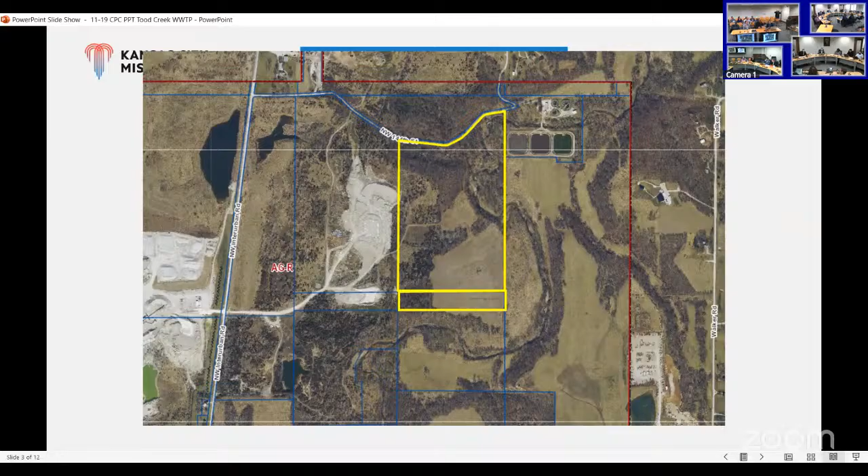The site is located in the very northernmost portion of the city, east of 169 Highway. Here's the site outlined in yellow. It is currently 2 parcels that will be combined, and you can see there is an existing access road off-site of the property that will be used to access this site, which you'll see in the site plan.

This is an AG-R agricultural residential district, which requires a development plan for utilities and services, which is the use for the wastewater treatment plant. Here we have the site plan, which is a combination of proposed buildings that will be constructed right away, and then also some future expansions. The total building area will be about 71,000 square feet.

There'll be a handful of basins, which you can see in the center of the site here, and then also a variety of administrative and operational buildings. The site will be accessed from the west on Interurban Road due to topographical constraints and sensitive environmental areas that restrict access from the north off of 144th Street.

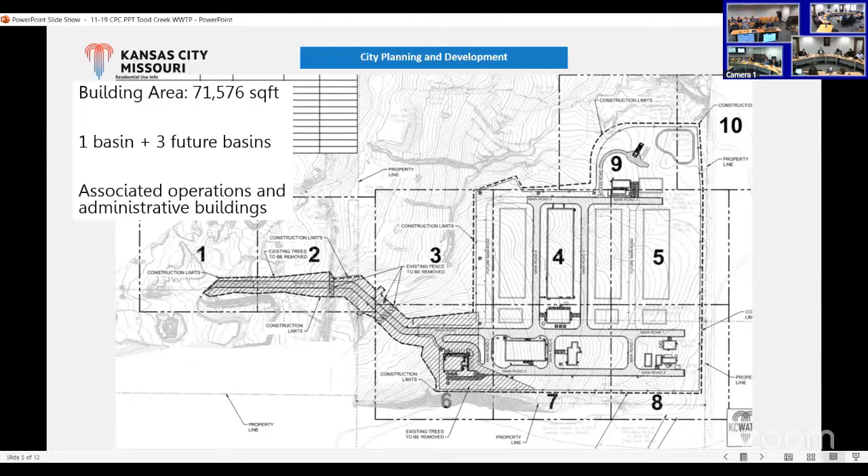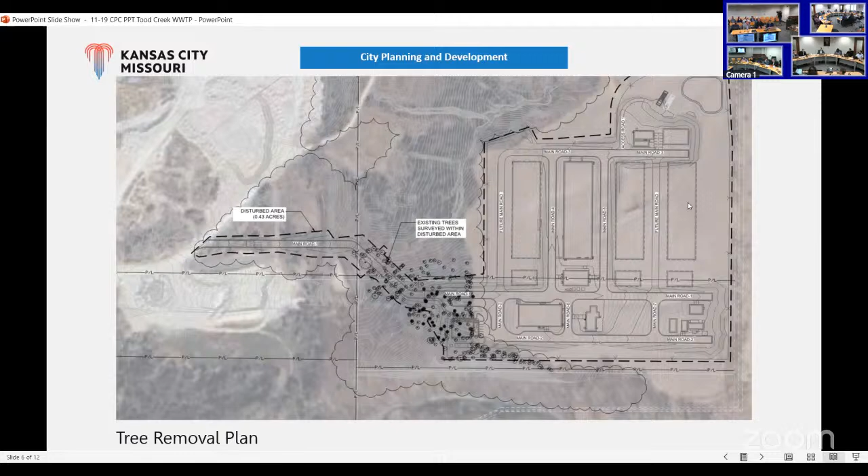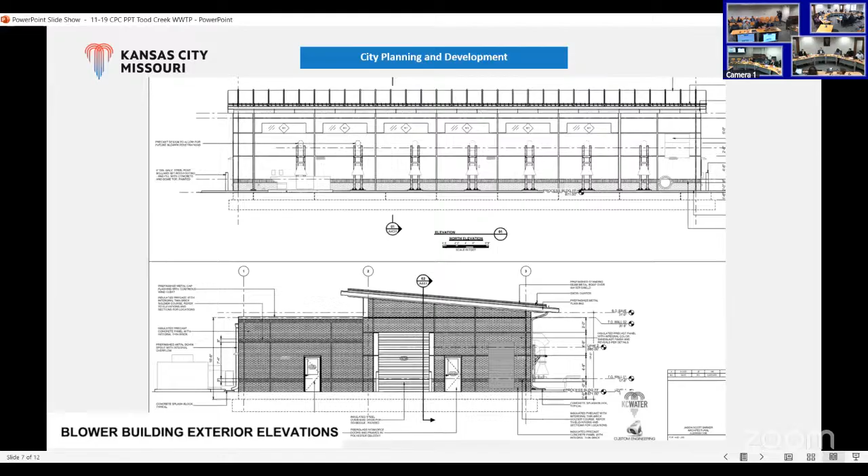There was a tree removal plan submitted with this proposal. As you can see, most of the development will take place in the area that does not contain mature riparian vegetation. I have some elevations of the buildings. Really, none of this will be visible from public right-of-way. It's very tucked back off of the road and will be set back off the interior property lines. These are just a variety of the admin buildings and other operational buildings.

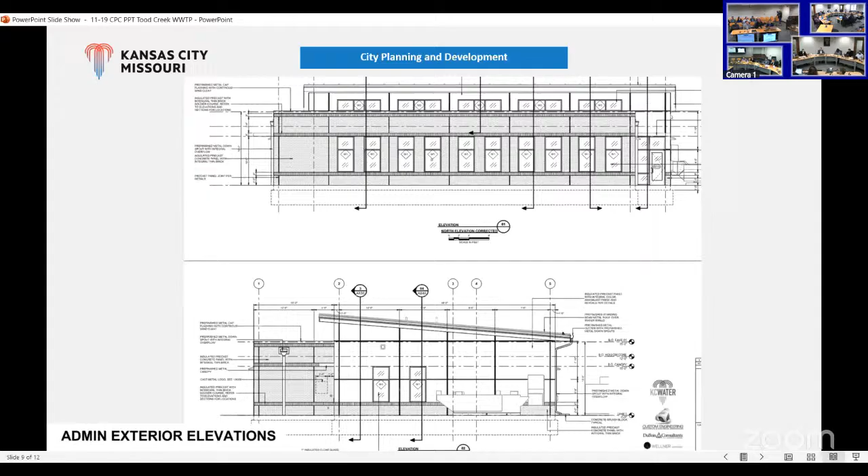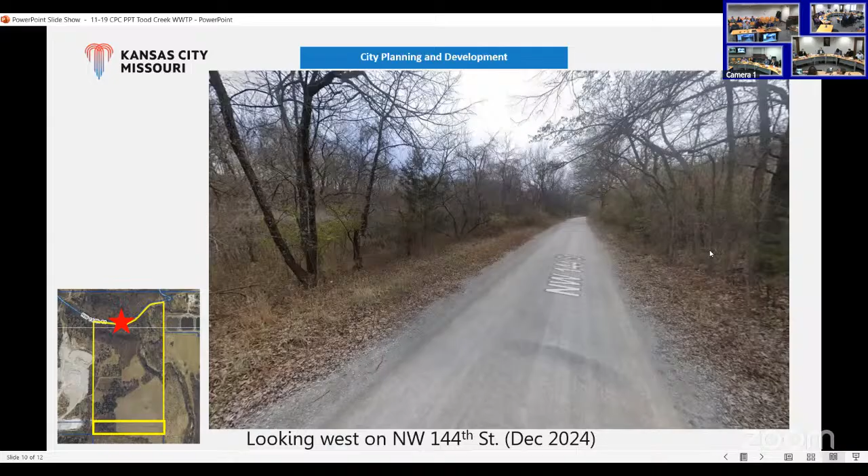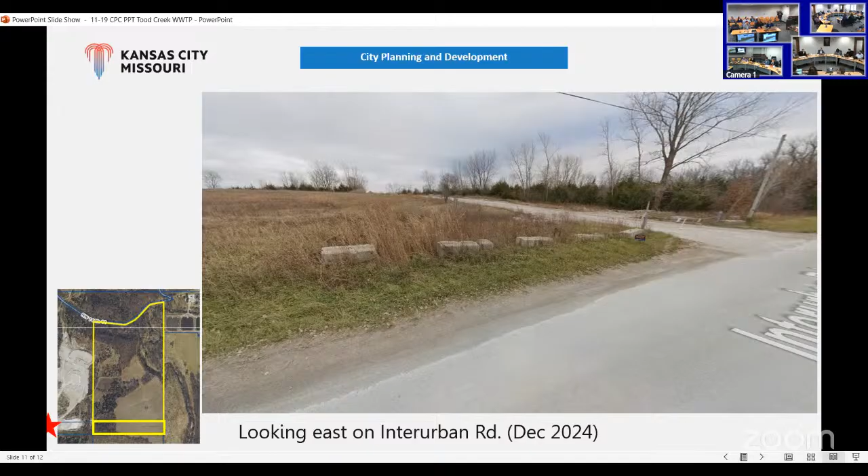Here are some street views of the site. This is the north side of the site. Again, nothing really will be visible from 144th Street. This is looking off of Interurban Road, where the access will be, and there will be cross-access easement agreements with Hunt Midwest, who owns the property that will be traversed to access this site. With that, staff is recommending approval with conditions of the development plan, and I can take any questions.

Thanks. Any questions for staff? If there are none, we will welcome the applicant. Welcome. Sorry, it's the first time doing this. I'm not really sure what to expect. Give me a presentation. Just introduce myself. Introduce yourself and anything you'd like to add.

Sean Cross, Senior Project Manager, Water Services. I'd just like to add that we're reaching capacity at our existing treatment plant up there in the Northland, and the condition of the existing plant is very poor. So that's the reason we're trying to move forward with this, and also to help support growth in the Northland.

Yeah, helpful for me. Can you give us an overview of this project and where it's located, how similar this is to the existing plant, et cetera? Yeah, absolutely. So the existing plant was built in the 1960s and then upgraded again in the 1990s. Back in 2020, we started a facility plan to review the condition, the growth in the area, and what we wanted to do with this existing facility. What we ended up finding out was in 2017, FEMA revised their base flood elevation by like 6 feet, which puts the existing plant mostly underwater.

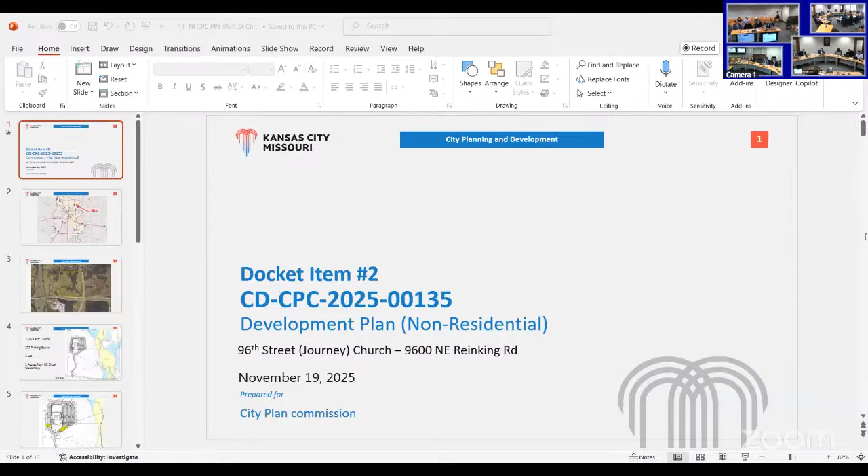Good morning. Morning. Are those for us? Of course they are. Are you going to replace those trees? Of course.

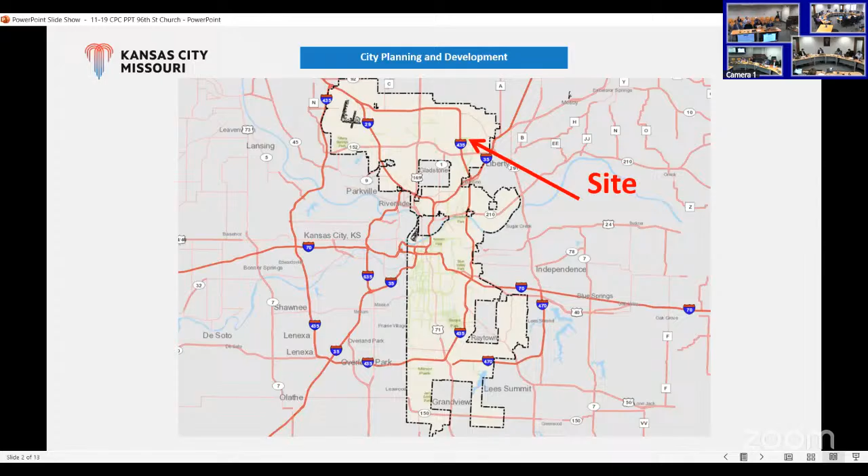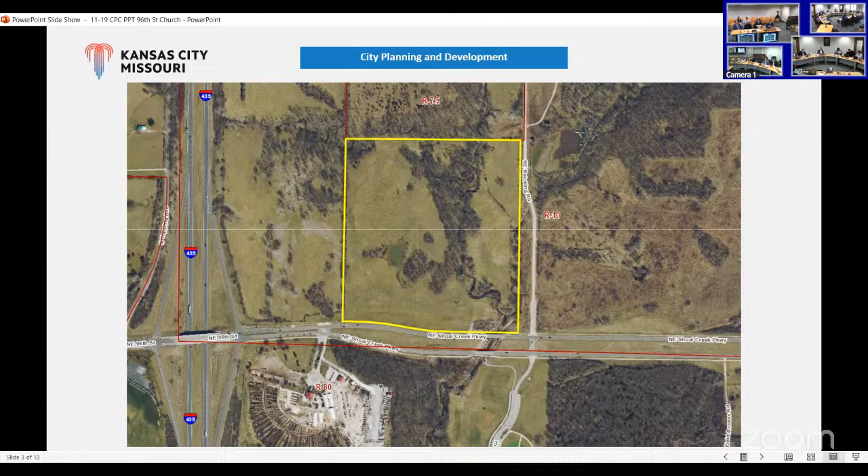As stated, we have docket item number 2 for a development plan for the 96th Street or Journey Church at 9600 Northeast Reinking Road. The site is generally located in the northeastern portion of the city, west of Liberty. Here's the subject site highlighted in yellow at the corner of Shoal Creek Parkway and Reinking Road. I'll note that this site is zoned R10.

That is why you have a development plan in front of you - religious assembly uses require a special use permit in R districts, however the applicant chose to file a development plan in place of that special use permit. The site plan before you proposes just under 23,000 square foot church with 222 parking spaces, all on the existing lot, with one proposed access from Shoal Creek Parkway to the south, staying out of all the stream buffer area to the east, adjacent to Reinking Road.

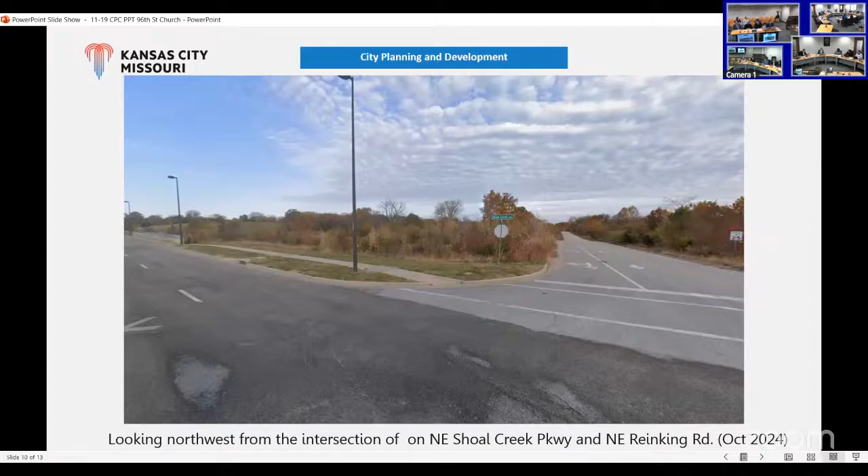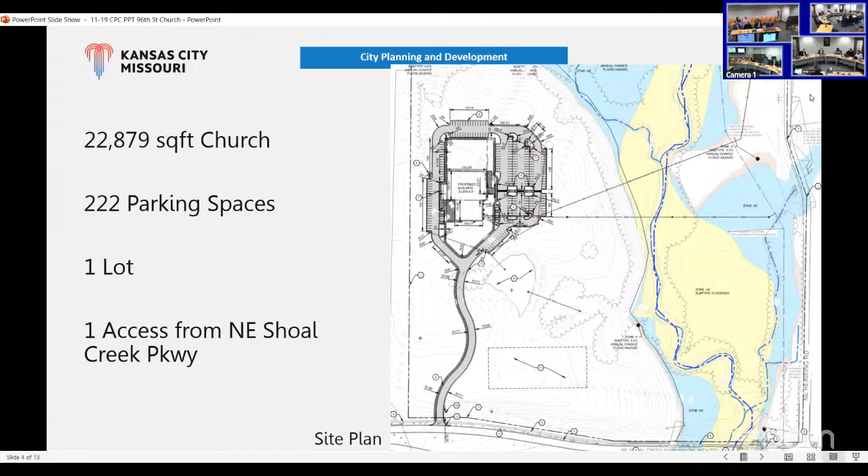Correction number 5 is from Water Services to extend the water main along the property frontage. Just jumping back to the site plan really quickly, the water main is north of this site in Reinking Road, and so the applicant is proposing to extend the water main to the northeast corner of the site and then carry it across to serve the building. I can let the Water Services staff speak more in detail about the requirement, but I believe they are asking for the applicant to extend the water main the entire frontage of the site.

So those are some of the outstanding corrections. There is a condition in the report that says all these corrections must be resolved prior to any ordinance request. With that, staff is recommending approval subject to all the conditions, and the condition that the plan be revised prior to going to City Council. And I can take any questions.

Thank you. To be clear, on plan corrections 1 and 3, are you saying those have been resolved in a different way and can be removed? They have not been resolved yet, but I spoke to the engineer on the plan, and he seemed clear on how he was going to revise the plan. So those will be submitted and then re-reviewed by staff before the ordinance is prepared.

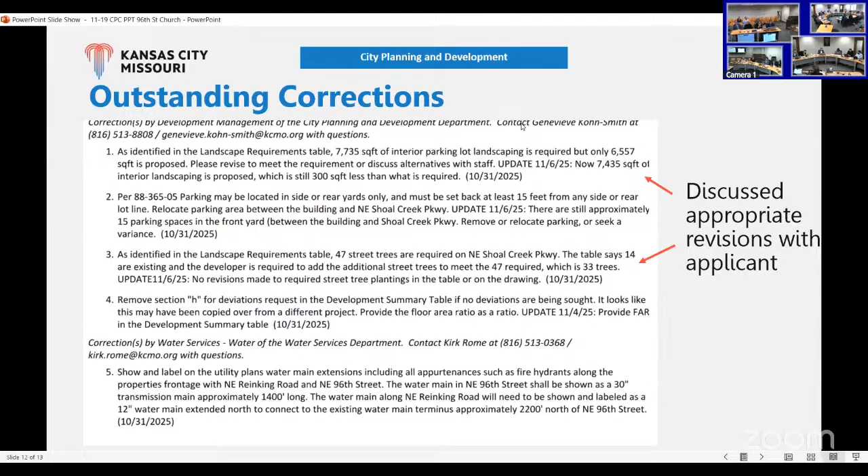Got it. All right, any questions for city staff? Genevieve, can you repeat for me again the portion of the parking that you said needed to be changed? You said something about 15 spaces in front?

Yes, so the use standards for public and civic uses state that all parking must be in the side or rear of the building. And these spaces that I've highlighted are, it's a little bit confusing because the building is facing east, but the front property line is generally considered the shortest street abutting property line. In this case, that would be Shoal Creek Parkway to the south here. So these parking spaces are in what is considered the front yard, which I know is confusing with the building orientation, but that is what the code says. So really, it's just a very small amount of spaces that need to be changed. But the entry into the building is facing the large portion of the parking lot? Correct. Okay, thank you.

There are no further questions. We will welcome the applicant.

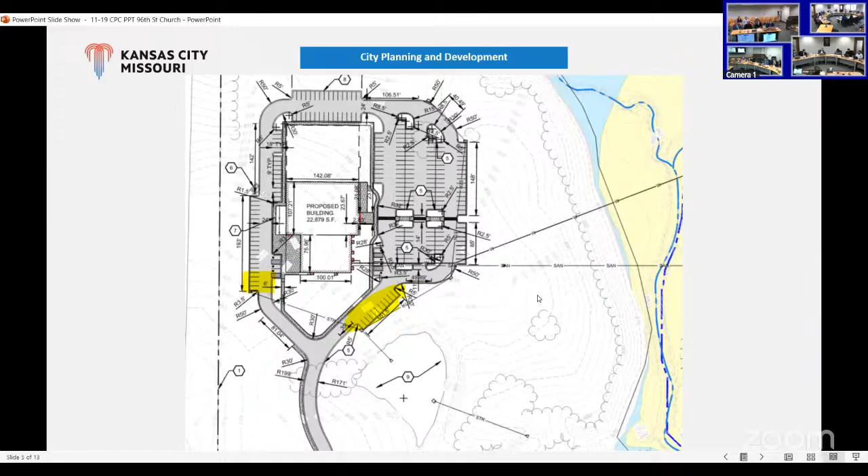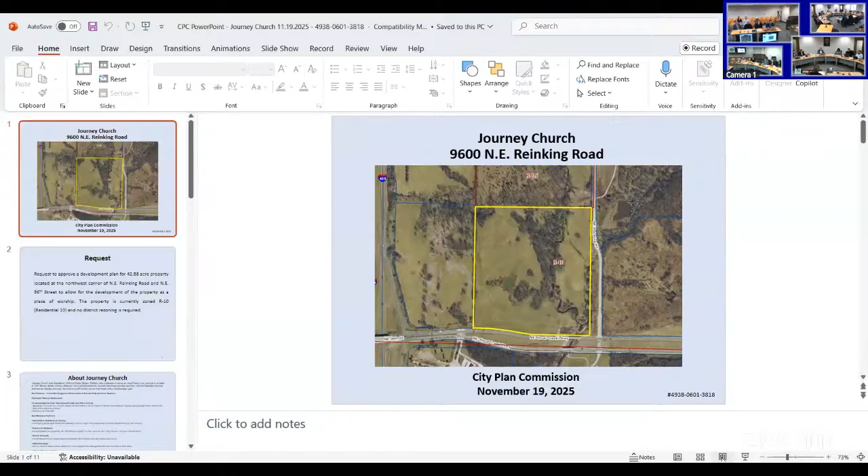Thank you. While Genevieve is pulling up my PowerPoint, my name is Patricia Jensen with the Rouse Frets Law Firm, with offices located at 4510 Belleview, although we're moving, so we will be closer to the plaza, and I'm going to have to memorize that address soon. To my right is Pastor Sean Phillips, who is the pastor of Journey Church. Paul Osborne is our engineer, and he will speak towards the water and sewer line if questions come up. And Michael Heitzman, who you've seen before as an architect, he happens to be a member of the church.

So we are really looking forward. I know the church is really looking forward to being able to get going and building its own worship center in Kansas City, Missouri. Right now it worships in Liberty in some rented spaces.

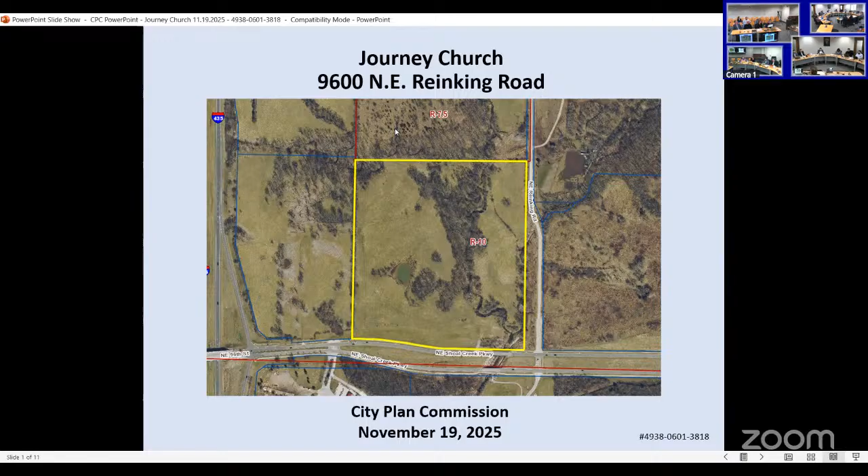So as Genevieve has identified, this is a request to approve a development plan for the 43-acre tract of ground located at the northwest corner of Northeast Reinking Road and East 96th, or Shoal Creek Parkway, to allow the worship center. It's currently zoned R10.

Everything is good about working with Genevieve on a number of issues. We have no issues with that. There are three main issues that I'm going to discuss as we get into the presentation.

So just a little bit about Journey Church. It was founded in 2006 by Pastor Sean Phillips, and he continues to serve as the lead pastor. On a typical weekend we have 3 worship services, 1 on Saturday morning or evening and 2 on Sunday morning. They also have a good youth ministry group that meets every Wednesday night.

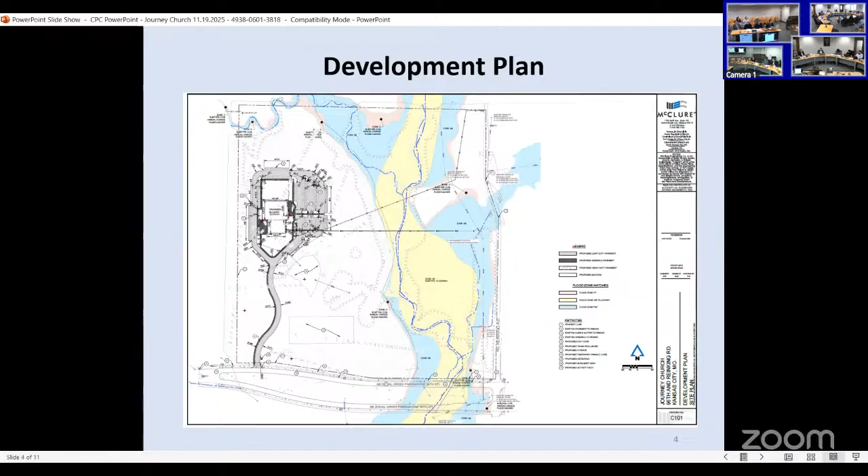And now I'm going to go into the 3 issues. They really deal with a platting requirement, a road improvement requirement, and the water sewer requirement, or the water transmission main, that the water department wants the church to build. So the platting requirement issue is that Journey Church is not subdividing the property.

Platting is normally required when you're subdividing property and creating lots. We are not creating lots; we're putting one worship center on this overall existing tract. The only reason staff has put in a requirement for platting is because that triggers road improvements and water improvements. That's why we're asking that on correction number 4, you eliminate the phrase 'with the plat,' and then delete condition number 8, which says platting is required.

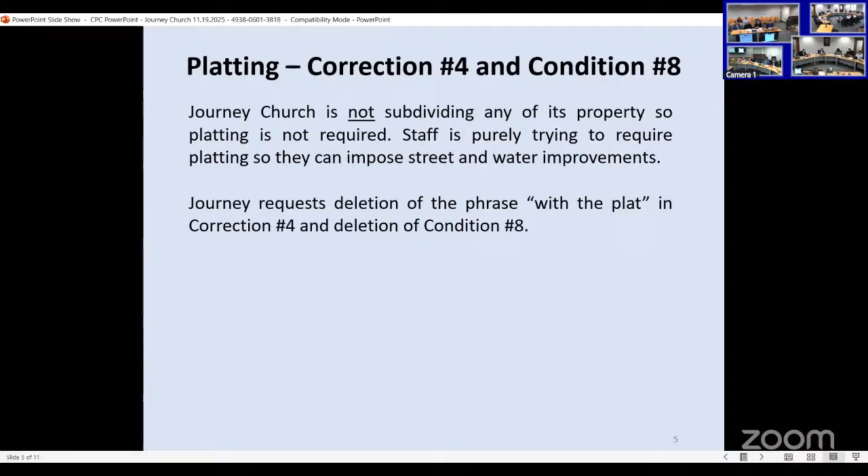The next slide deals with the improvement to North Reinking Road, which is condition number 21 in your staff report. It's the standard condition that says the west half of Northeast Reinking Road shall be improved as required by Chapter 88. I agree there's a general belief that anytime you're touching or adjacent to a road, you have to improve it, but there's another analysis that needs to go beyond that: whether that improvement is reasonably related to the impacts generated by the church. We have no access onto Northeast Reinking Road. That improvement alone—and you've got to consider this is a church trying to raise funds to build its sanctuary—that improvement and cost is about $11 million. That improvement alone is $750,000.

So we do not believe that requirement is justified by the layout of this development plan. Should the church in the future decide to further develop the property, that may be a very justifiable condition, but right now our only access is onto Shoal Creek Parkway. So we've asked you to delete condition 21.

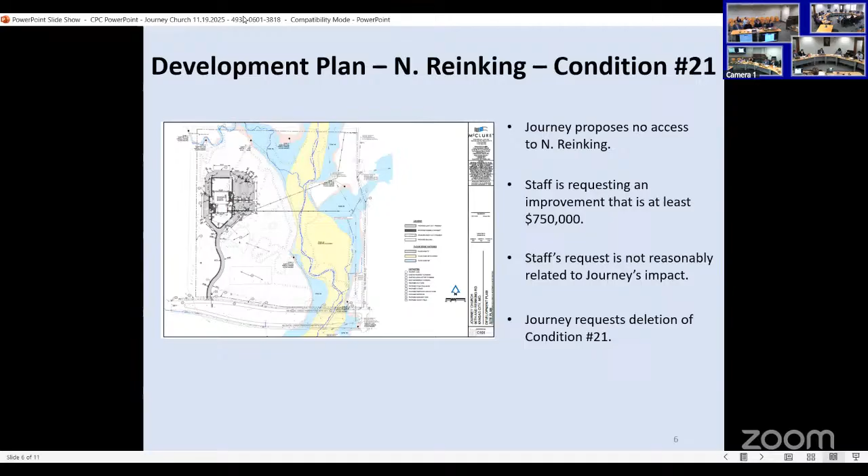Water access. I'm going to have Paul Osborne explain where the water is, but we are not proposing to obtain water from Shoal Creek Parkway, where the water department wants us to put in their transmission main. Our proposed water is from the north. So Paul, do you want to explain that and explain the cost difference of each?

Sure. This is an odd corner in the city where there are very few utilities. Even the gas is not nearby, and they're going to end up having to pay to extend the gas. But as far as water is concerned, the nearest water on Shoal Creek is at Line Creek Parkway, which is about 3,000 feet east of this property.

So currently, we're proposing to extend the 12-inch line on Reinking, the 700 feet necessary to get it to the property, and then extend a service line across the creek and over to the church. The city's standard requirement would be that it gets extended all the way down Reinking, another 1,400 feet to Shoal Creek, and then upsized to a 30-inch transmission main, another 1,500 feet over to the west property line. So the costs for those are pretty substantial.

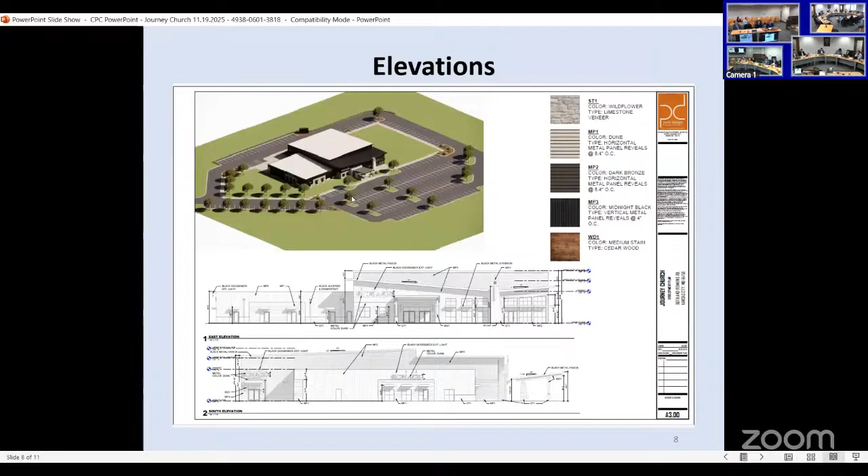Otherwise, here are the elevations which have been shown to you. And the request is to approve the development plan subject to the corrections and conditions, with the deletion of the phrase within the plat on correction number 4, and deletion of conditions 8, 21, and 25. And with that, we are available for any questions.

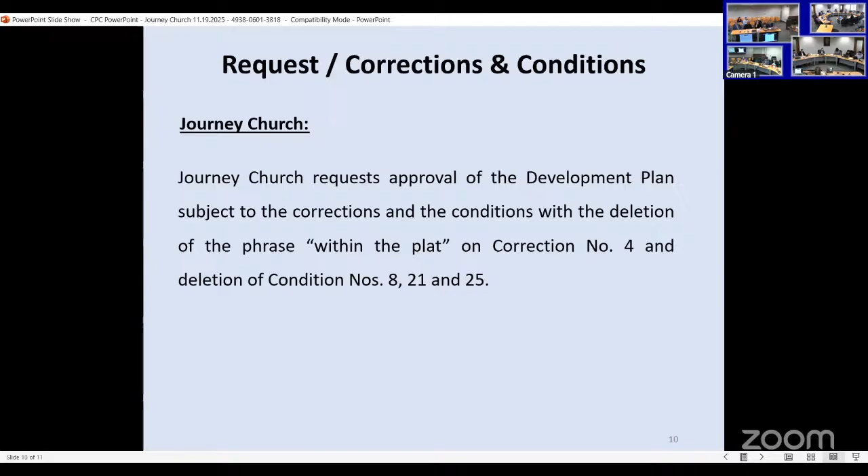Great, thank you. Are there any questions for the applicant? I'll start it off. Mine is more future thinking. So I saw in the plan that this site is 42.88 acres. How much of that acreage does this sanctuary project take up, and do you have any plans for future development?

Commissioner Beasley, there may be future plans at some point in time, but right now the focus of the church is to build its worship sanctuary. I understand that, and I don't know how much it is, and that's why I acknowledge some of these conditions could apply to future development, but it doesn't apply to what's in front of you. It's very unreasonable to sit there and say you're building an $11 million sanctuary and we're going to lump another, besides the other costs that we have, almost another $2 million on top of you.

As you know, that's not my intention, and I am one that looks at the future of how something will be developed and how it ties into the current plan before us. That's why I asked the question. This project doesn't appear to take up that much of the 42 acres, so that's where my question came from. We will have to come back to you with any future approvals. It could require rezoning to a certain extent if it's not related to the sanctuary and the church use. I mean, yes, there is a lot of property out there, but they want to build their sanctuary first.

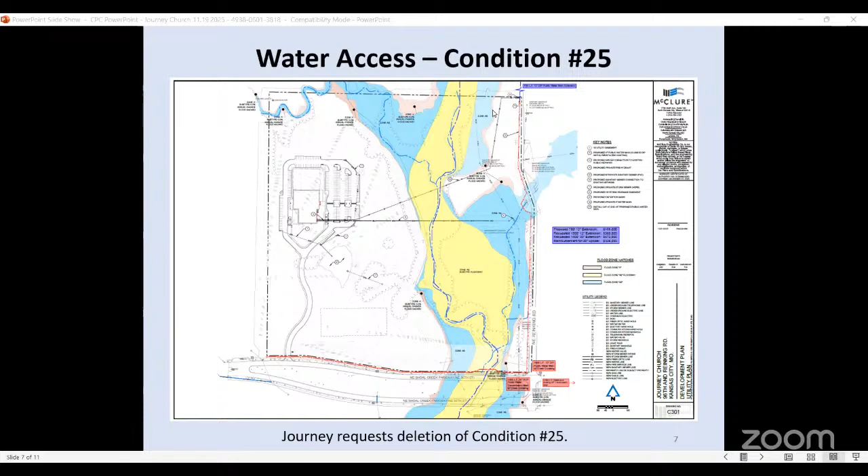Yeah, I think some of that may actually be in how that's phrased. When you're saying offload the cost, it's the responsibility of the development. It's a pay-as-you-go system. You pay it and build it as you go.

Commissioner Hasek, can I add a couple things? I acknowledge there's rules and regulations of the water department, but you've got to take those rules and apply them to specific development sites and say, is that a reasonable request to lump onto this property owner? Paul also pointed out to me that Hodge Park, when the city developed Hodge Park, on the south side here, they did not extend the 30-inch transmission main. So the rules are okay to ignore for the city, but not for these individual property owners.

So I think Sarah had said before the meeting that we are likely going to get time at a future commission meeting to discuss this type of thing so that we have a better understanding of it. I do want to move from the theoretical to this specific instance.

And so, Travis, do you have a sense, are you able to say today, in this moment, what the potential benefit is of extending water as it's been asked, based upon the neighboring sites? Knowing that Hodge Park is likely going to be Hodge Park, knowing that the landscape supply is already there, and yes, it could be redeveloped, do you know what water access looks like to the west and to the south?